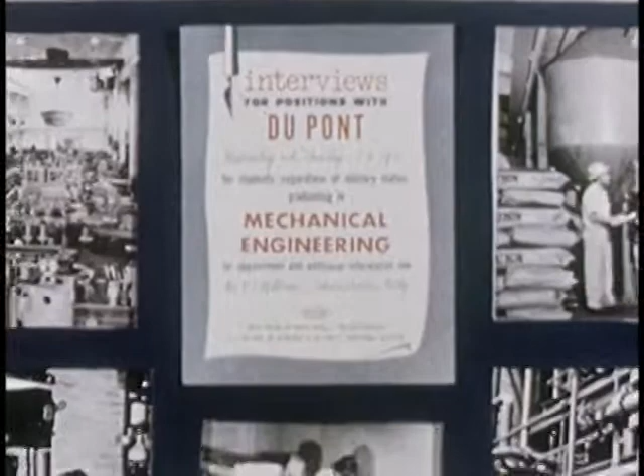This motion picture has been made to help you men who have chosen mechanical engineering as your profession. Perhaps you've considered working for a chemical company, and wondered what a chemical company wants with men of your training, whether you'd be working for chemical engineers, or whether a mechanical engineer would get very far in a chemical company.

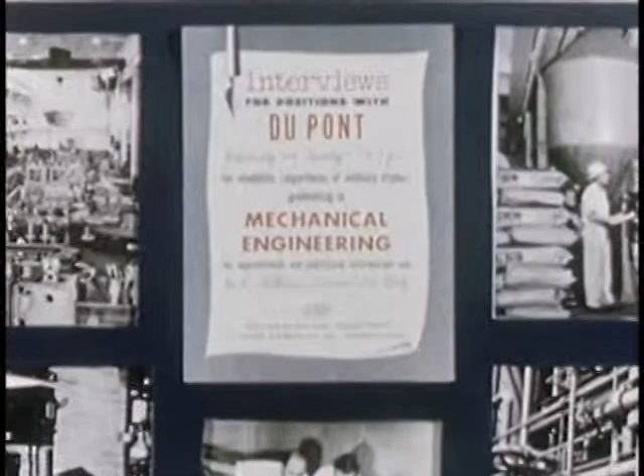That's why we want to show you something of what goes on at DuPont, where your advancement depends more on your interests and ability than on your field of training.

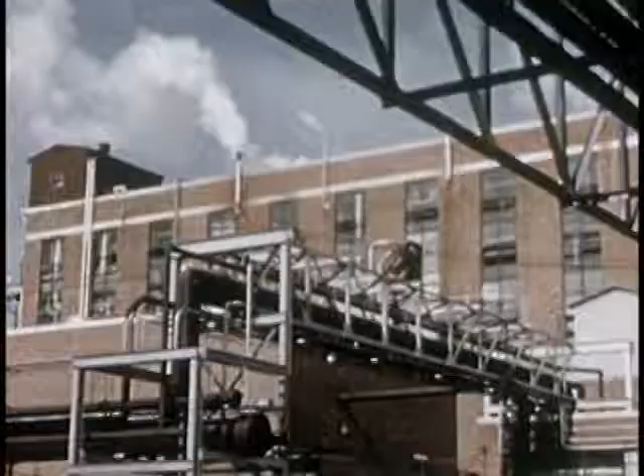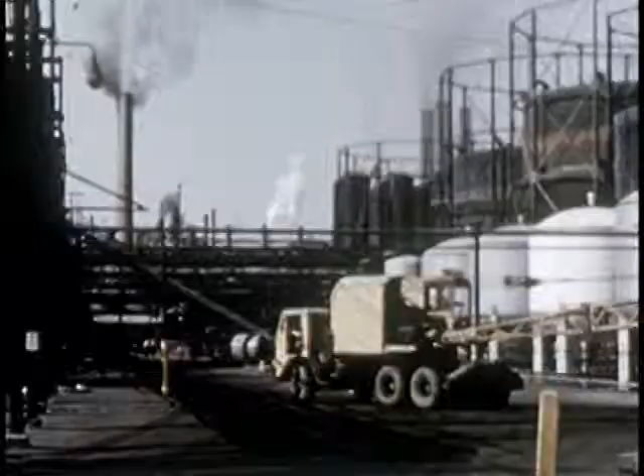Keep in mind throughout this visit to DuPont that the chemical industry is a growing one, growing by leaps and bounds. Just to give you an idea, at DuPont, in the first 5 years after World War II, over $700 million were invested in the manufacturing side of the business. There are now more than 70 plants in 25 states.

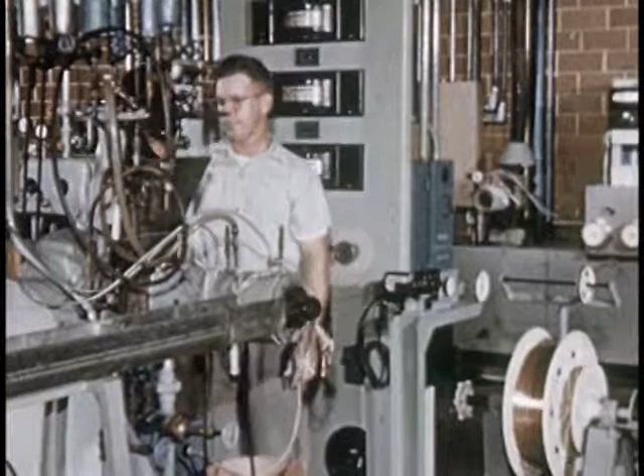No one can actually tell where the end is. But we do know that every year, new and more complex products come out—new fibers, new finishes, films, dyes, plastics, agricultural products. Just a few examples. Before making any one of those products commercially, a mass of mechanical problems first had to be faced, appraised, and solved.

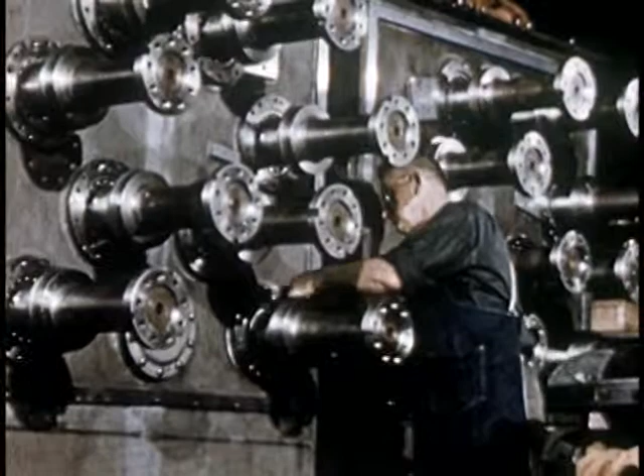And here's something important to keep in mind. At DuPont, mechanical problems are solved by mechanical engineers. The company does practically all of its own engineering work, right from the very beginnings of fundamental research. It not only develops process equipment, but actually makes a substantial part of it.

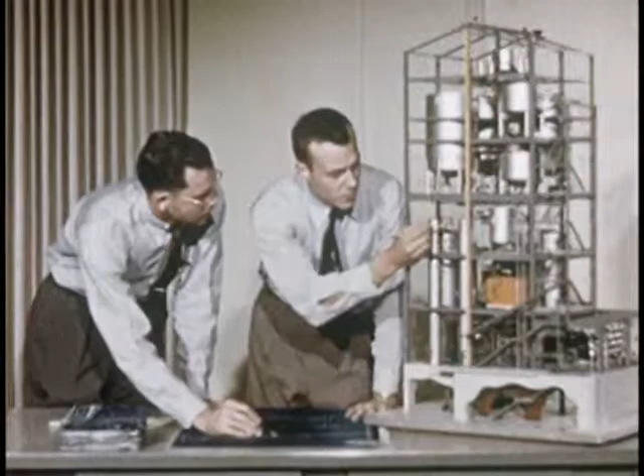DuPont men work continuously on ways to improve existing equipment. They design and build the plants, carry on the maintenance, and of course, supervise manufacturing.

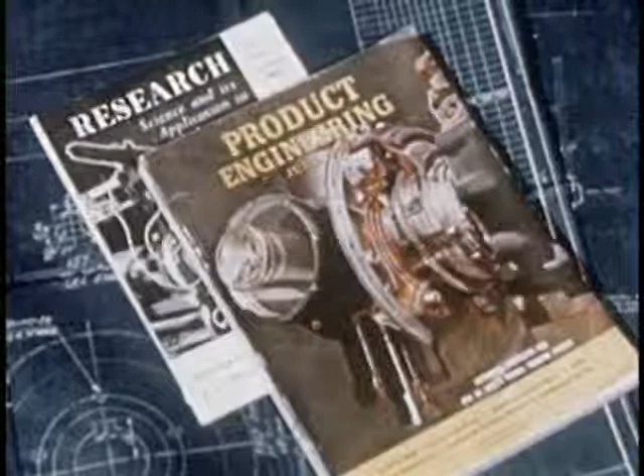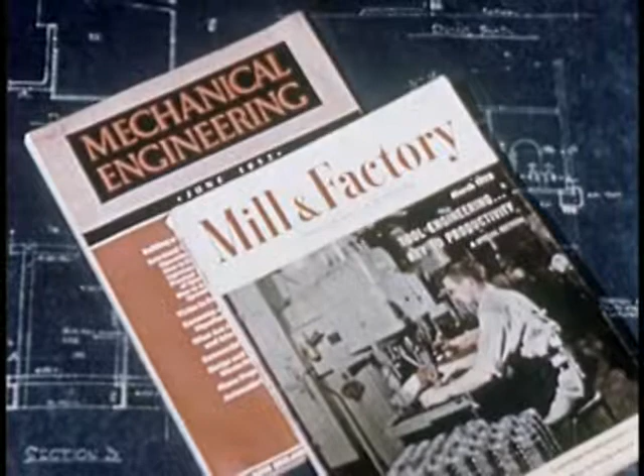Let's consider the opportunities available to you here. Is research and development your special interest? Or machine design? Maybe you're the kind of fellow who goes more for that. How about plant engineering, including power, maintenance, design, and construction? Or production supervision? Perhaps you lean toward this kind of work with its handling of people.

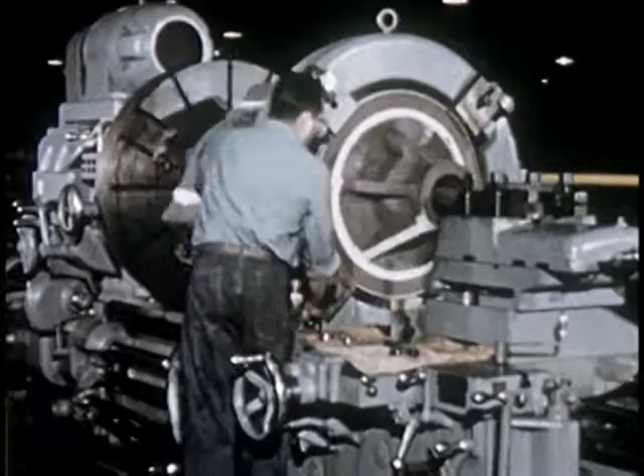Let's start with research and development. Some of the work is done here at the experimental station. A mechanical engineer in this field develops mechanisms used in making the company's products. His work may result in a massive piece of equipment like this, or in a delicate instrument like this one.

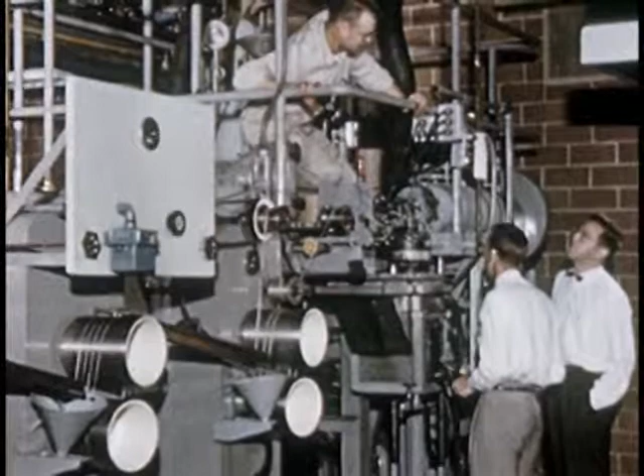There's never been a shortage of problems for research and development engineers. They run into the thousands, actually. They may lead to original equipment to meet new and specific needs, or to improvement of machines already in operation. Let's look at a few examples.

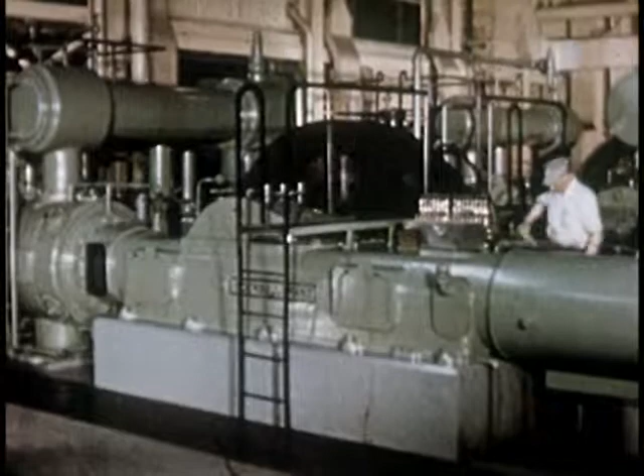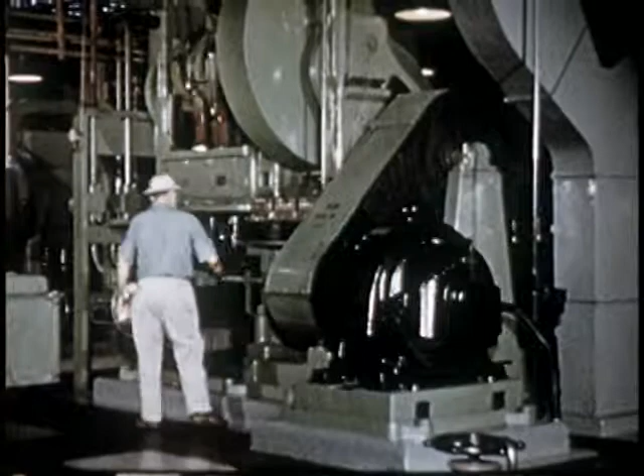These huge compressors are used in making urea from carbon dioxide and ammonia at high temperatures and pressures. Ammonia pumps like this can deliver about 100 tons a day. At these high pressures, machine work, alignment, and assembly are extremely important. Tolerances are severely narrowed as pressures climb.

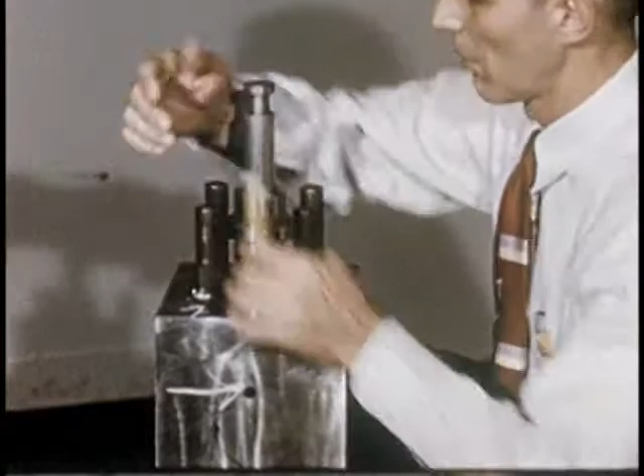One of the secrets of this type of high-pressure work is the action of the pump plunger in the packing. Specification of the right plunger material is essential. High-pressure design calls for great pains to avoid stress concentration, such as might occur in sharp transitions at corners. Pulsations at high pressures cause rapid fatigue of materials and give rise to many design problems that fall strictly in the mechanical engineer's lap.

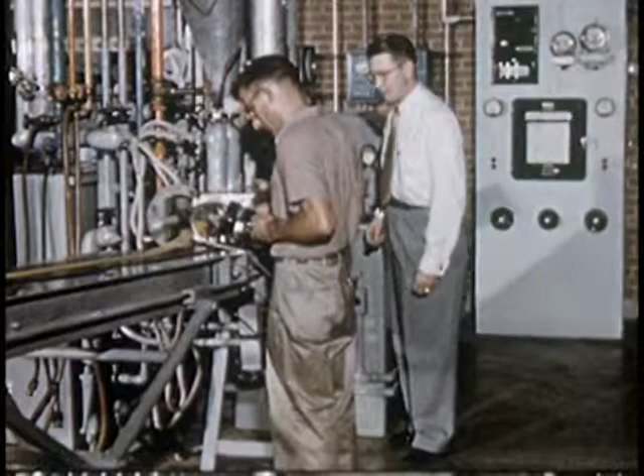Now here's a machine used in the plastics industry. It's called an extractor extruder. It melts plastic, takes the solvent from it, and extrudes it in one operation. To adapt it to DuPont plastics, or to scale it up or down, called for studies in power requirements, heat transfer, and fluid flow.

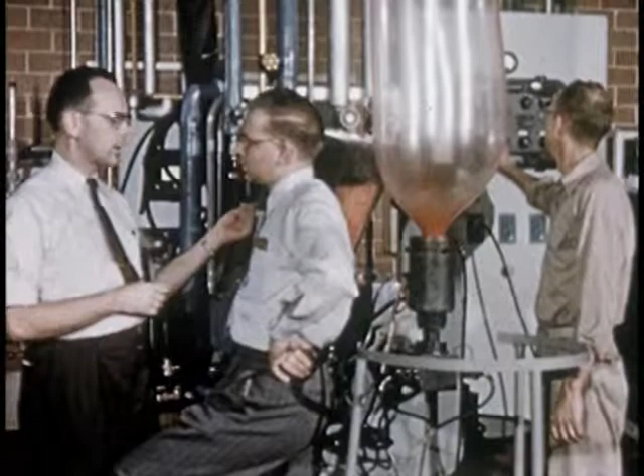In other cases, engineers often design and develop equipment for use by DuPont customers. Here are two young engineers working to improve a machine that simultaneously forms and expands a tube of plastic material.

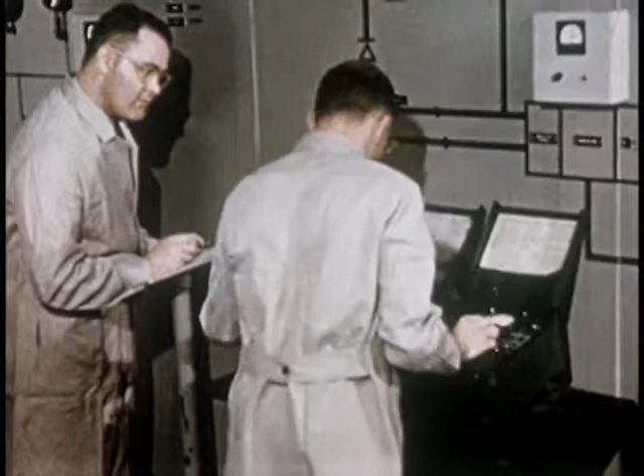Or a fellow may get into a project that requires work at super pressures. Here's a field that's really challenging, and young too. Behind a steel and concrete barricade, equipment can be tested at pressures far beyond those used in manufacturing today.

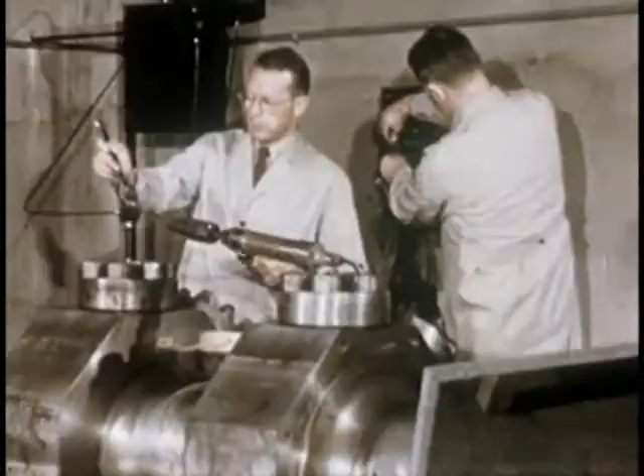After strain gauges have been attached to the test piece and the pressure lines connected, a mirror is placed so that an engineer can observe the results of the test through a periscope on the other side of the barricade.

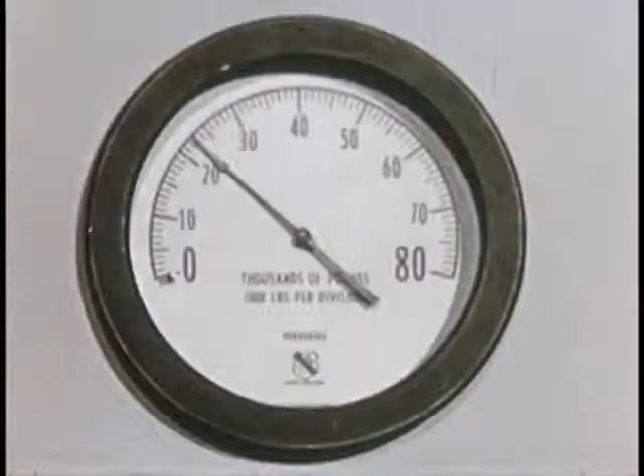There will come a time when pressures far beyond those of today will be used—20, 30, 40,000 pounds per square inch. These men are getting ready for the time when pressures even higher than this may become part of industrial practice.

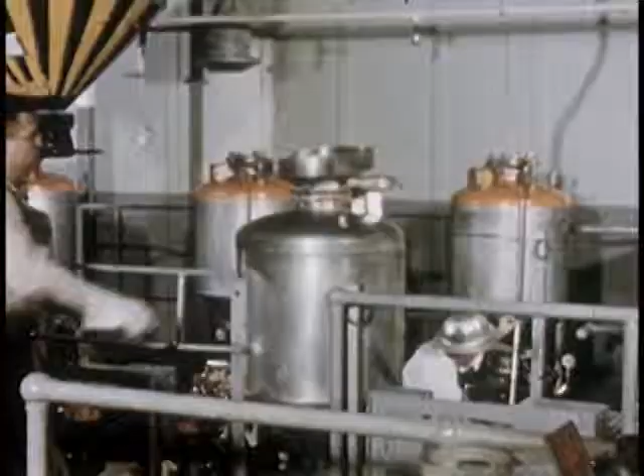When a process or product worked up by chemists moves out of the lab, teams of mechanical and chemical engineers take over. For example, here you see molten nylon being solidified on a semi-works casting wheel at an early stage in the development. Many mechanical problems had to be solved before nylon was produced successfully, and naturally, mechanical engineers had a big part in solving them.

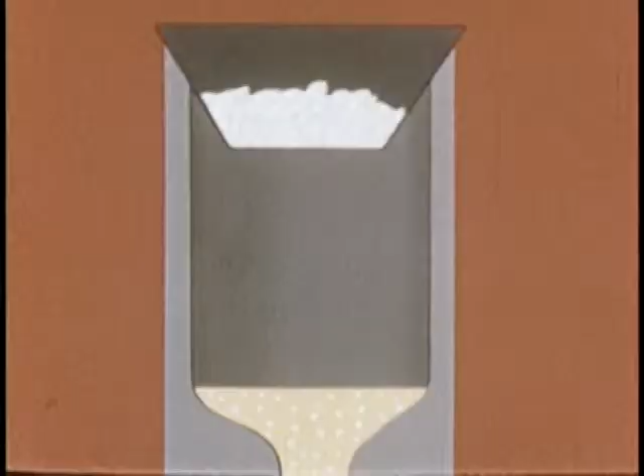Just how would you go about melting nylon chips at several hundred degrees Fahrenheit with as little decomposition as possible? Well, mechanical engineers designed and tried quite a few types of melting grids. Some of them didn't work as well as others, but they finally came up with a grid that did the job.

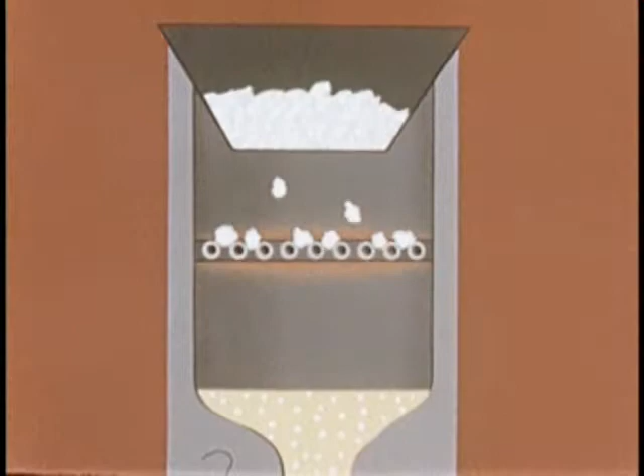Mechanical engineers designed a precision pump that works at pressures better than 1,000 pounds per square inch, but not before they licked the problems of gasketing, sealing, and materials.

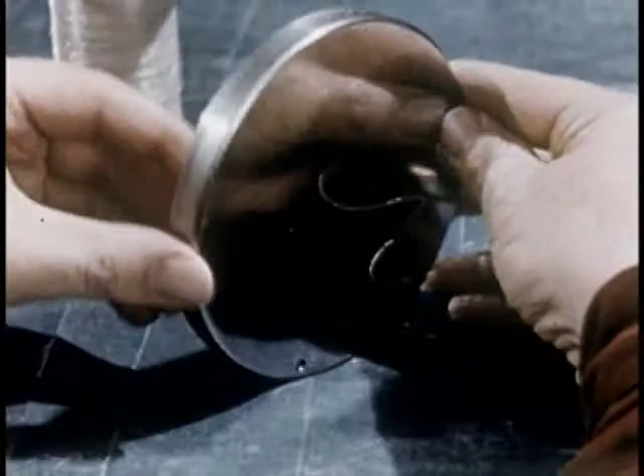The hot melted nylon solidifies into filaments as it is pumped through holes in the spinneret that are almost too tiny to see. Naturally, that spinneret isn't a standard item either. It had to be designed.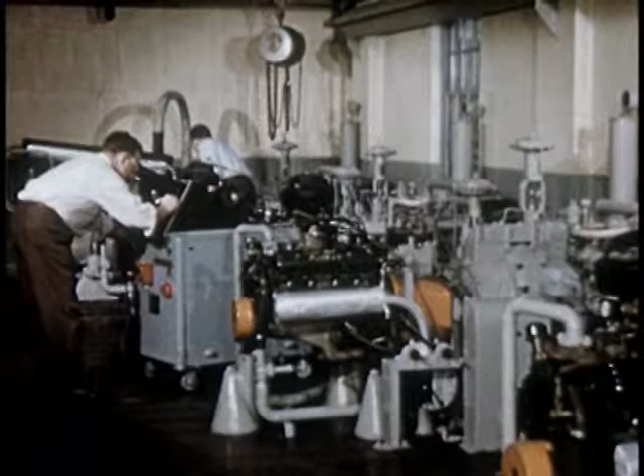Let's move on to this petroleum laboratory to see another important part of development work, activity devoted to improving existing processes and products. Here, engineers are constantly trying to improve the chemicals DuPont sells to the petroleum industry.

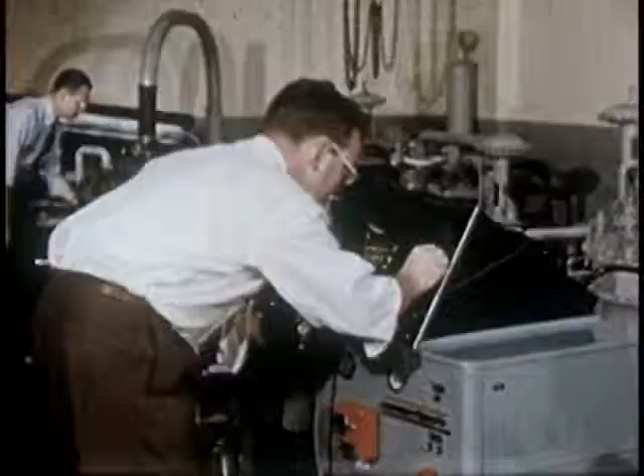Here, engineers are studying exhaust condensates that indicate the effects of tetraethyl lead. Engineers study these things in the laboratory.

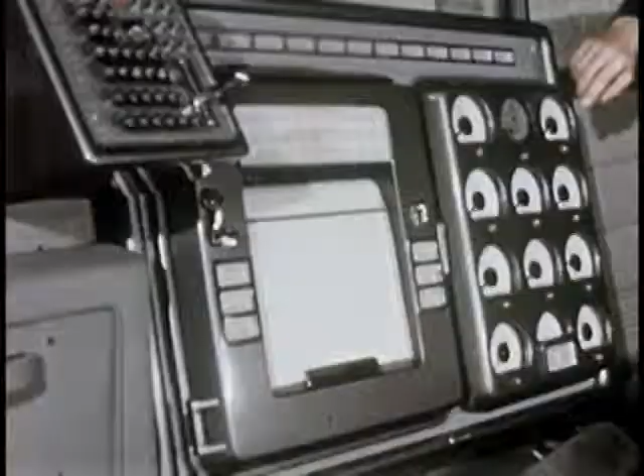They study them out on the road, too, in passenger cars, in trucks, through tests under various kinds of rigid control situations. The instruments in this test car indicate and graphically record information on such factors as horsepower, fuel consumption, speed, spark setting. That's the way mechanical engineers, working with chemists, arrive at conclusions which result in better and better engine performances.

We have seen that research and development includes developing new process equipment and improving existing processes. It also includes design. The engineering department handles design work for most major projects.

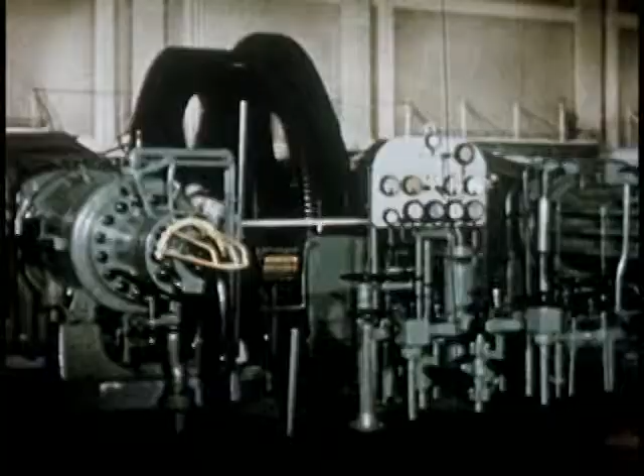In some cases, it is machine design. In others, process equipment design. But always, it is the work of teams of engineers—mechanical, chemical, electrical, civil, and so on. Normally, these are men who make their careers in engineering. They work with engineers from the manufacturing departments to design plant equipment and machines.

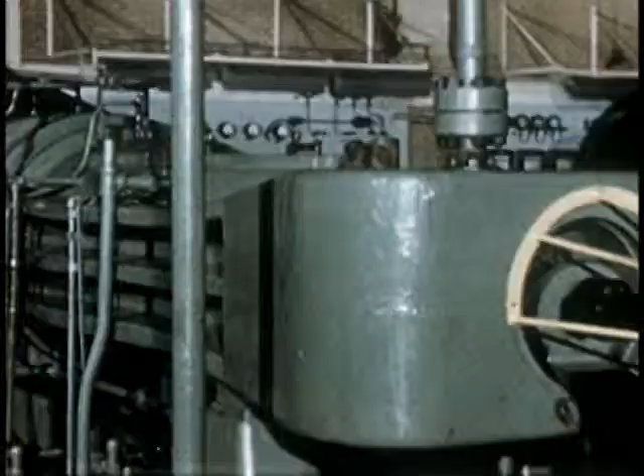For an example of major design, how about this huge hypercompressor? It builds gas pressures from 450 pounds to 12,000 pounds in 3 stages. When these compressors were built, you just couldn't buy equipment like it, so DuPont engineers pitched in and designed their own.

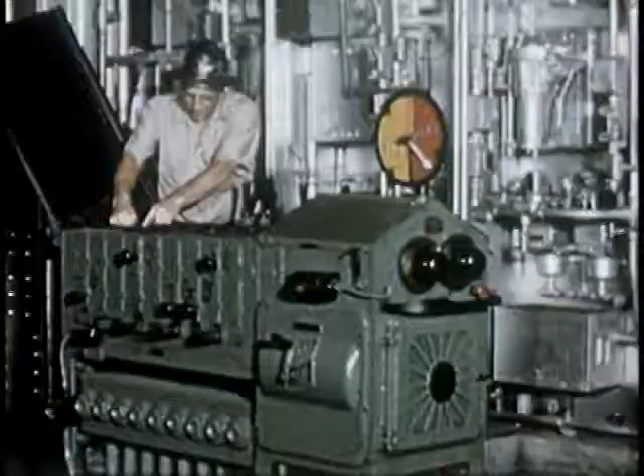Or maybe you'd like to roll up your shirt sleeves on one like this—adapt standard equipment, such as this blue gas generator and its control mechanism, to DuPont's ever-changing needs. Over the years, more than one mechanical engineer has thought hard on this one. There she goes.

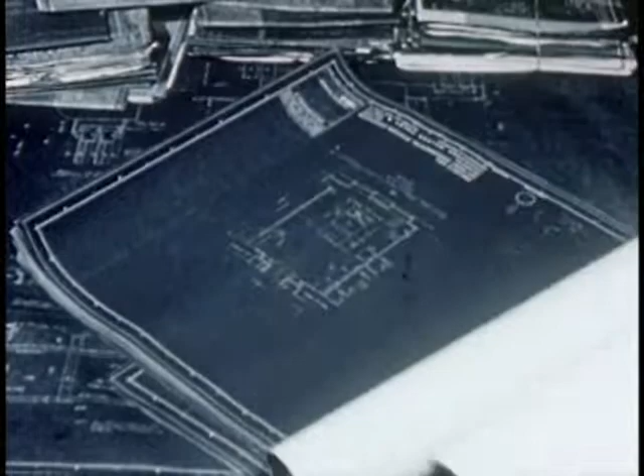These are just a few of the problems mechanical engineers work with at DuPont. They are typical of the work in research and development. Multiply them by 100—no, better make that 1,000—and you begin to get an idea of how important mechanical engineering is in this chemical company.

Another important phase of mechanical engineering is plant design, layout, and construction. Most companies use outside architects and contractors for this work, but DuPont does all its own.

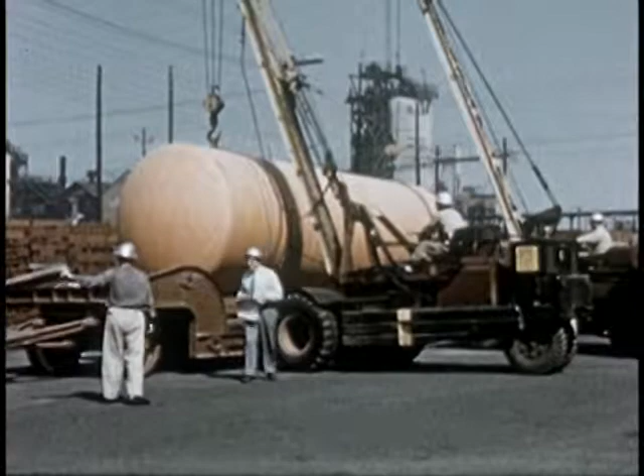Often the engineers who supervise the construction of the plants also stay on to help get them going. Of course, the design of services to go along with the buildings and machinery is included in their activities. For instance, this nylon manufacturing plant.

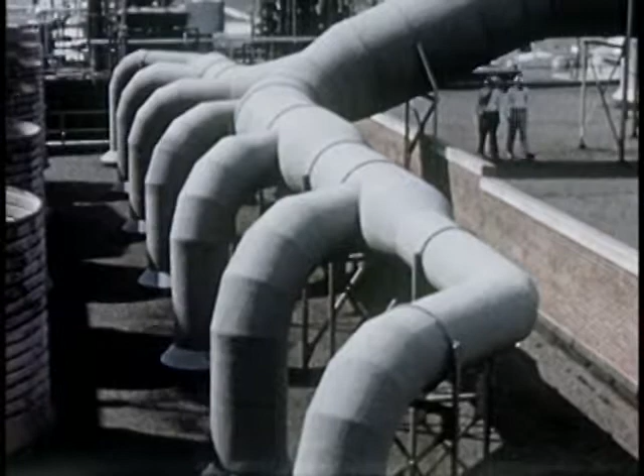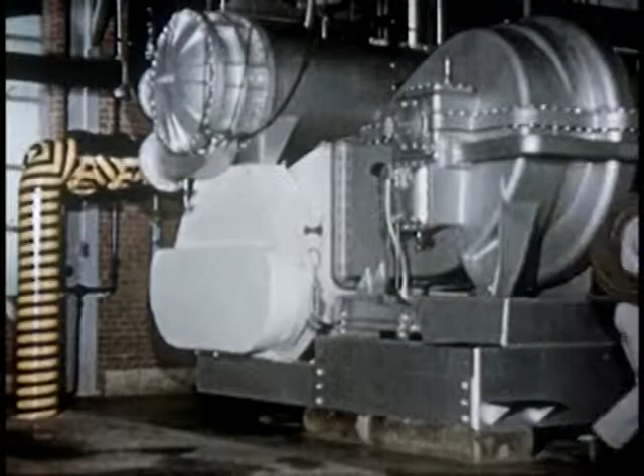These ducts are part of an air conditioning system DuPont mechanical engineers help design. During the manufacturing process, air is required at 5 separate temperatures and humidities. That's right, 5. That sort of a problem interest you? As you can imagine from the size of this compressor, air conditioning is a pretty important item in many of DuPont's 70-odd plants. Or say you were tackling this problem: scrubbing carbon dioxide out of a gas mixture.

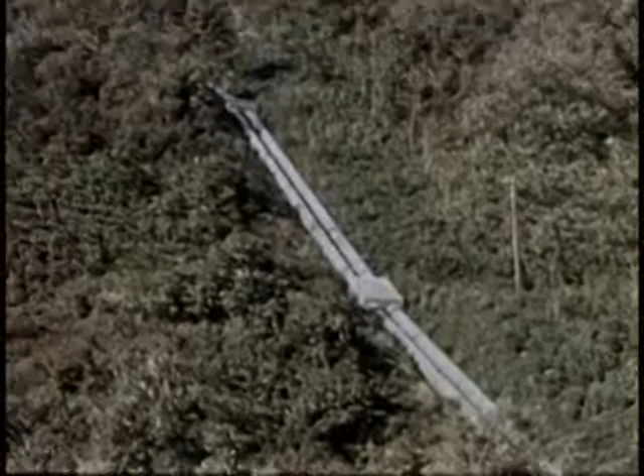These towering scrubbers work at about 400 pounds. The pressure at the scrubbers forces the solution up the side of a mountain. Here in this tower, the pressure is released and the carbon dioxide passes off to the air. The natural fall of the water gives 200 pounds of head that doesn't have to be supplied when the water is recycled. That's both equipment and plant design in a big way.

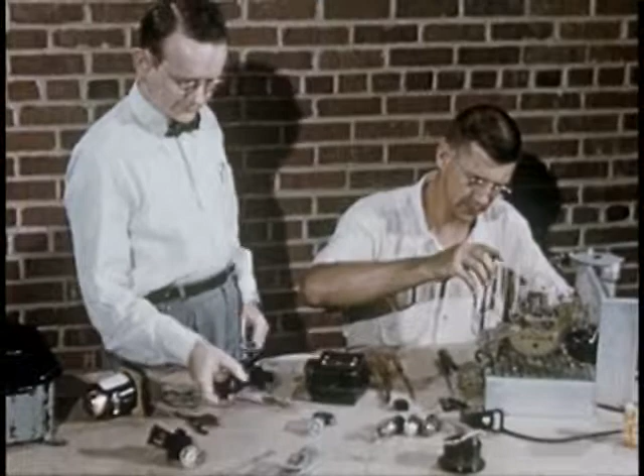Speaking of design, how about control instruments? That sort of work interest you? They are very important in plant design, and the advances in this field have been tremendous. Matter of fact, control instruments today are practically a must for nearly every phase of manufacturing operation because they've come to mean so much in terms of safety and economy.

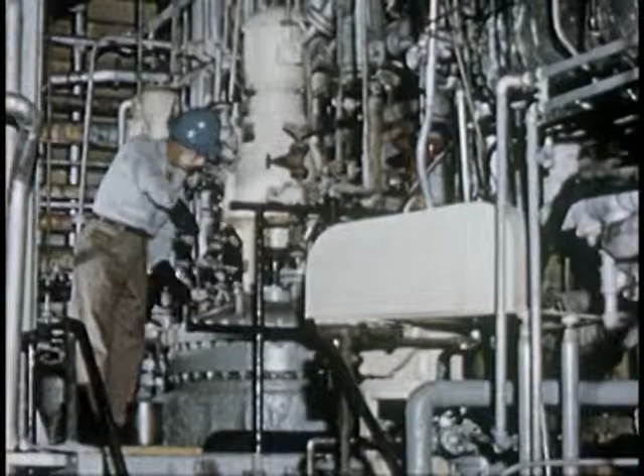Take a look at this maze of pipes, for example. To get maximum production yields, reacting chemicals must be brought together under conditions as nearly ideal as possible. All steps in the process must be smoothly coordinated.

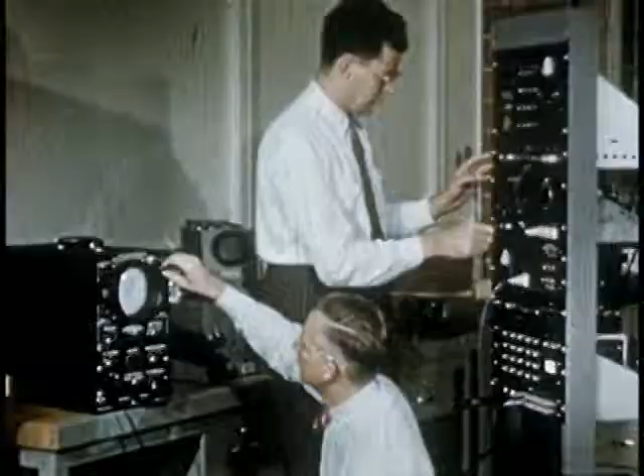Actually, some processes of today couldn't operate with instruments of 10 years ago. It's a fast-moving, intensely interesting field. If this kind of work appeals to you, whether you tackle it from the plant design end or from the development end, instrumentation offers tremendous opportunities.

Still another field for mechanical engineers at DuPont is plant engineering. This is a fairly broad field, including maintenance and power. It also includes design and construction on sub-major projects that may involve process improvement or plant expansion.

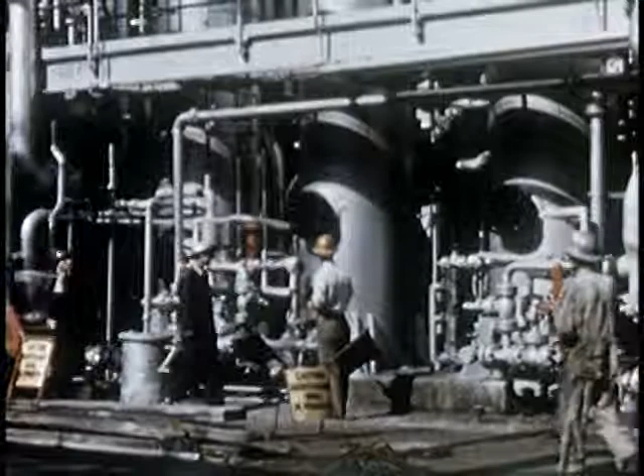Nearly all chemical manufacturing operations must run in mechanical equipment: tanks, kettles, presses, pumps, valves. And this equipment gets heavy use, much of it on a 7-days-a-week basis. It's bound to wear out, and that means maintenance.

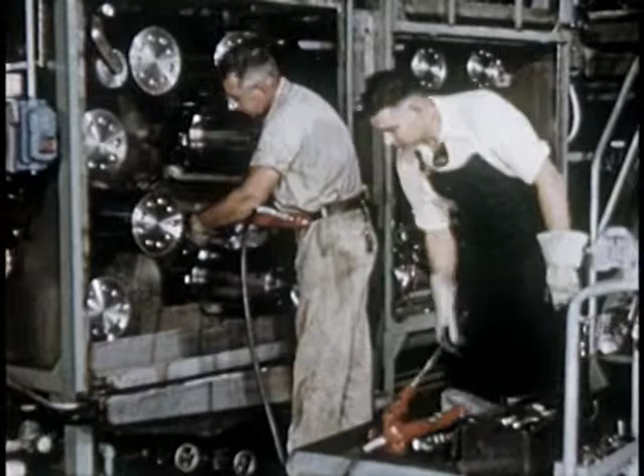Part of maintenance is keeping equipment in top mechanical shape, catching trouble before it catches you. Supervising this work calls for real ingenuity, and it involves real engineering ability. Then there's the maintenance of pumps, gearboxes, automatic lubricators, and a great variety of complex equipment and process machinery. Here again is a supervisory job for alert engineers.

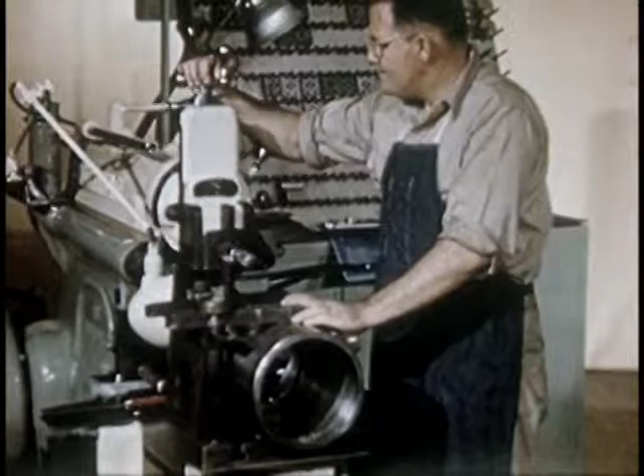Helping with the maintenance work are the machine shops at many DuPont plants. The needs of some of these shops are always changing. That means an almost continuous program of mechanical study ranging from layout and scheduling to working up shop standards.

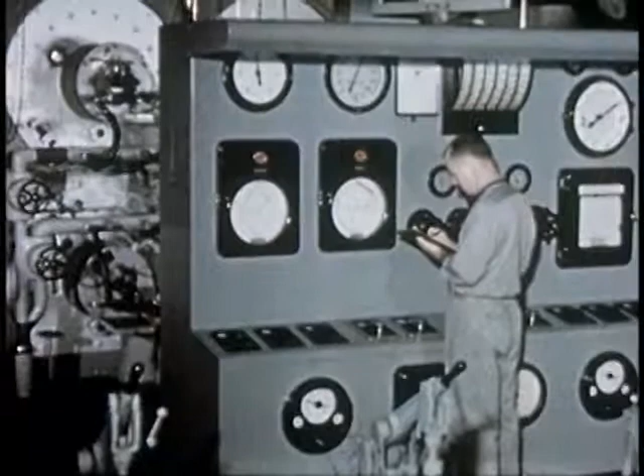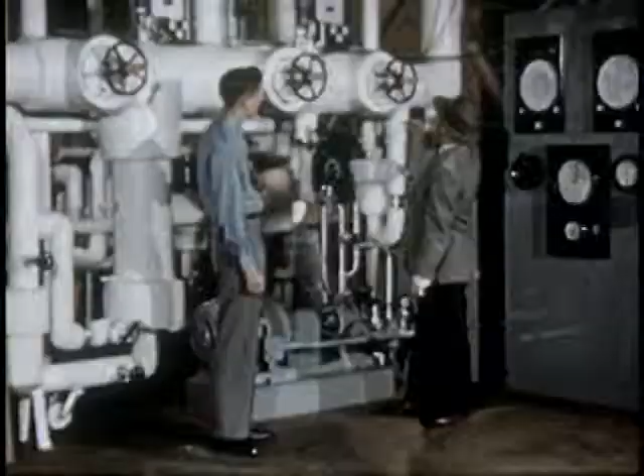Now, let's say your major interest is power. Power is as essential in a chemical plant as it is in any other kind. And the power problems that arise from some of DuPont's complex operations are about as challenging as can be found anywhere. Power engineers at DuPont must supply steam, electricity, water, air, refrigeration, and other services under a variety of conditions.

Look at this steam-reducing station. It is one of several operating at various pressure differentials. They supply steam at the right pressures and temperatures over a wide range of capacities, from 1,000 to 20,000 pounds per hour in short periods of time.

Boiler feed water pumps, compression distilling units, fuel pumps. Almost all power plant equipment needs plenty of engineering know-how to avoid interruption in these essential services.

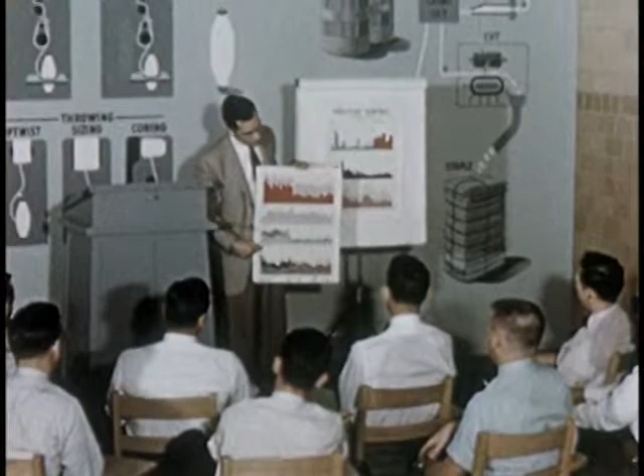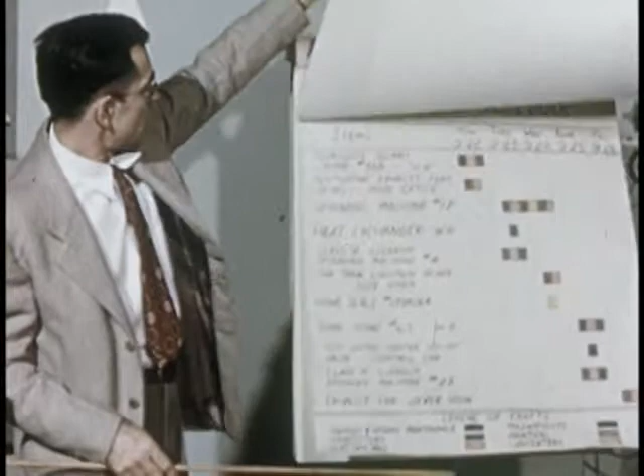Production supervision is another major activity at DuPont for engineers who like to work with people but still want to put their technical training to good use. The duties are broad and cover all phases of plant operation. Such a job might well include setting up efficient maintenance schedules for equipment, keeping production rolling, maintaining quality, reducing waste, and at the same time, building employee morale.

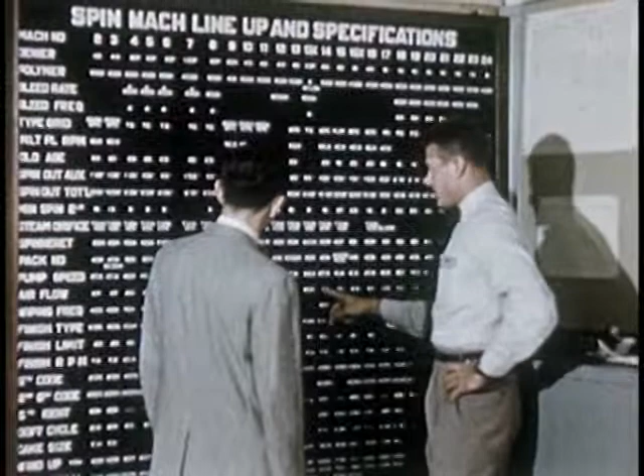Quality production is determined by individual workers. Each must understand the importance of his job, and it's up to the production supervisors to develop this understanding. The mechanical engineers and others who advance in this work train both wage roll and professional employees in manufacturing processes and the use of equipment, an important responsibility.

They also work with development engineers in plant technical sections and the central engineering department. Here their knowledge of the manufacturing process is used in working out designs for process improvement or new plants. In all cases, the planning and conduct of a continuing program of training in safe working practices is an important part of supervisory work. Raw material scheduling, quality standards of intermediates and finished products, handling employee suggestions, all are part of the work in production supervision.

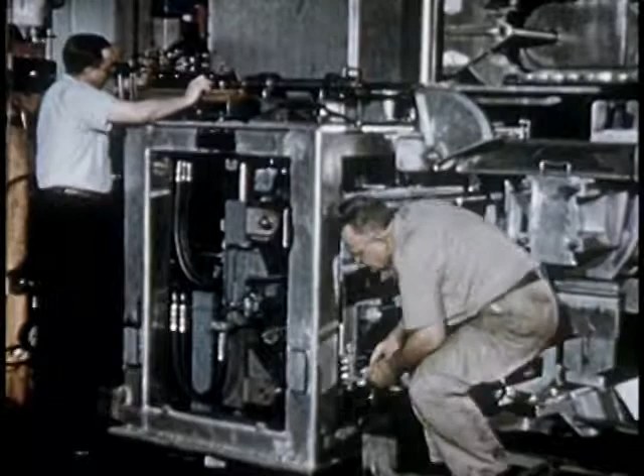The Mechanical Development Laboratory is evidence, too, of how important mechanical engineering is at Dupont. A principal activity of the laboratory is to develop and build full-scale automatic machines to be used as models for those in manufacture.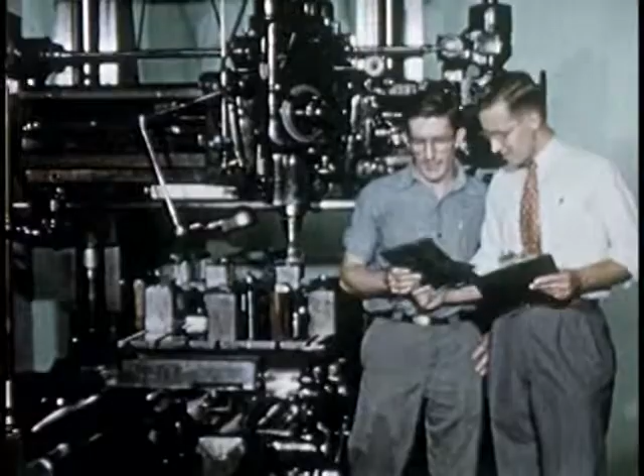The Wilmington shops are still further evidence. They make special equipment and machines for company use. They are among the most completely equipped in the country, and it's all top-notch equipment, ranging from small bench lathes to large diameter boring machines.

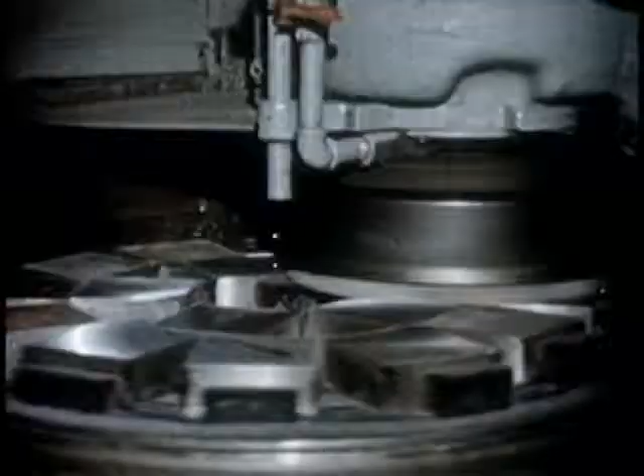Notice that this radial drill press has built-in pits for deep drilling. And how often do you see a 50-inch magnetic chuck? It makes possible the grinding of filter press plates and frames.

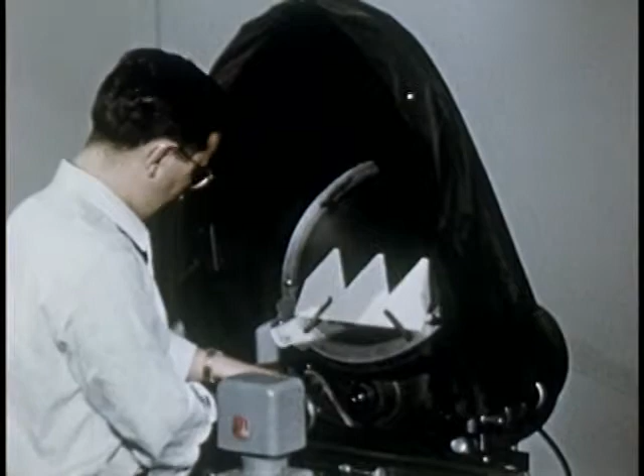Here's something else, a 12-foot vernier gauge that, in spite of its size, is as accurate as the best of the smaller ones. This optical comparator shows up errors on machining as small as 2/10,000ths of an inch. And here's a micro drill that puts holes in hard metal so small that you have to use a microscope to get a good look at the hole it drills.

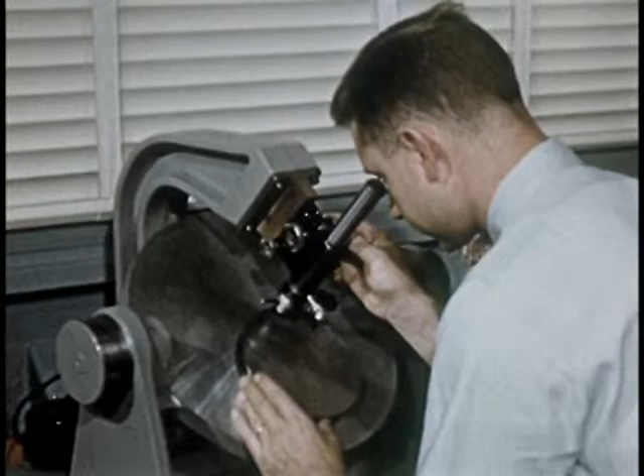Yes, a mechanical engineer has quite a bit of elbow room around here with all this equipment to serve him.

Now that you have an idea of what does go on in a chemical company, you can see that instead of no opportunities, a mechanical engineer has many opportunities to use his abilities and training, and in many fields. Because DuPont's 10 manufacturing departments operate to a large extent as 10 separate companies, the way a man heads towards his goal varies from department to department.

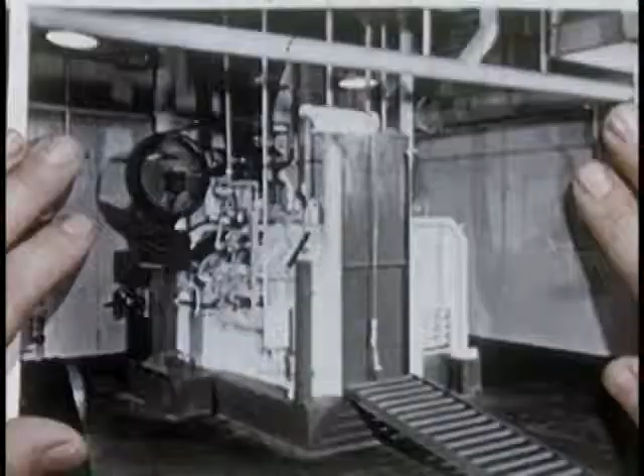You might start off working with a man who has had many years of practical experience. You collect material, assemble data, make calculations. In other words, learn the ropes. Gradually, you'd take on more and more responsibility until you've had enough experience to size up a problem, develop a method of attack, lay out a schedule, determine costs, and see the project through. In short, be on your own.

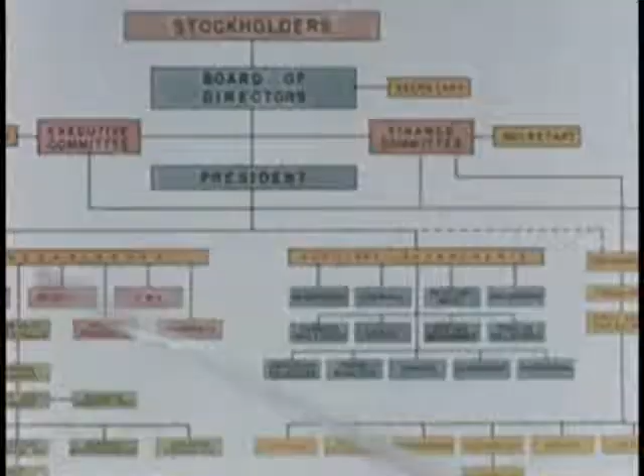In the manufacturing end, DuPont has several types of training programs. You may begin on an informal basis in a plant, as with some departments, or you may attend a formal training program that includes conferences on leadership, procedures, employee relations, company policy, and safety. In either case, you have every opportunity to get a broad picture of the company, as well as to learn your job. But regardless of which way you go, you'll find vast sources of information for your use.

Fine libraries with technical, trade, and patent literature. Over 100 engineering consultants within the company, each an expert with years of experience. Metallurgy, stress analysis, power, lubrication, instrumentation, yes, even meteorology.

At DuPont, there is a never-ending need for better machines, better ways to do new things to meet the challenges of the future. Research and development, design and construction, production supervision, and all phases of plant engineering unite to meet these challenges. Mechanical engineers work with each other and with specialists of many other fields towards a single objective: better living for mankind through new ideas, new methods, new products, and improvements on existing ones.

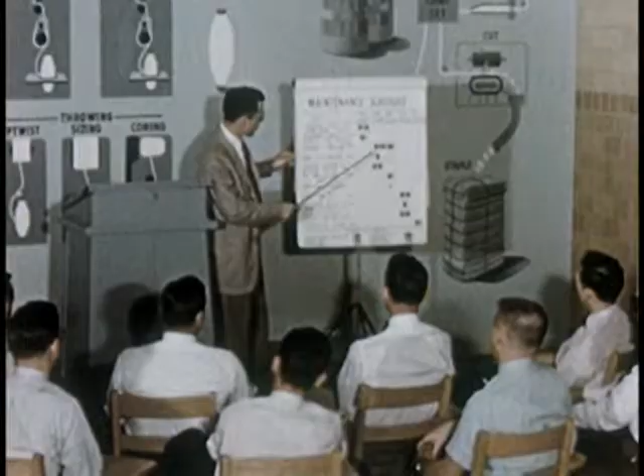There are many opportunities to contribute to this objective. And while doing so, there is the opportunity to express your creative talent and ability, to accept real responsibility, whatever your field of training. Yes, in such an environment, you can look to a bright future with confidence and optimism.